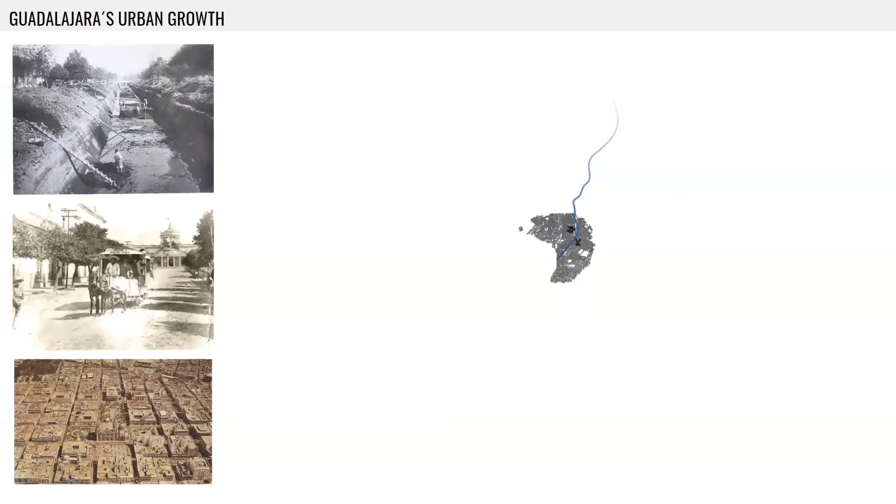Guadalajara's urban growth started within the settlement around the streams and further adapted to the Spanish colonial grid. After understanding how the city developed, we could conclude that the last 20-year settlement expansion had taken place towards La Barranca and its surroundings.

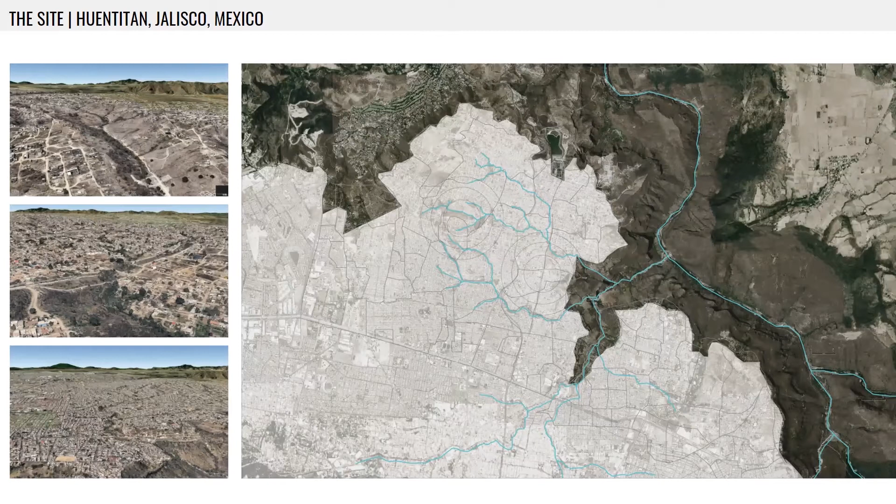Within the site, we can observe a classification of settlements differentiating those formal from the self-built ones. The latter are considered with this nomenclature due to the spontaneity of their conception, their lack of services, and the precarious public infrastructure such as paving of the streets and public lighting.

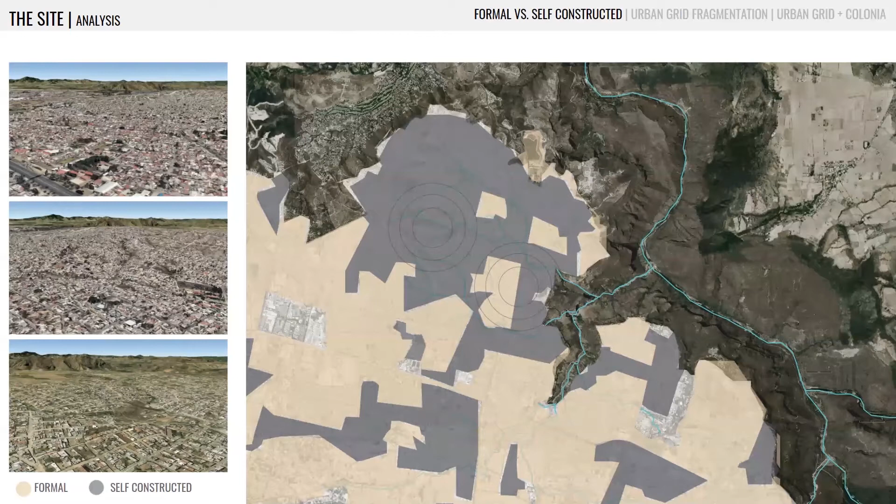Even though the barranca is known as the most relevant topographical accident of the place, it was also possible to identify a sequence of topographic variations through the Zapopan sector that characterize the place.

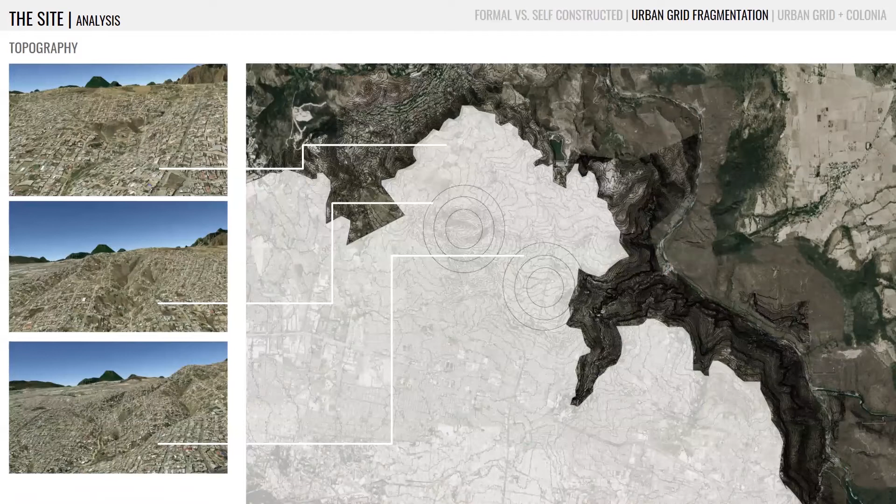In addition to those that have a constant water flow, there are also dry streams, where in certain sectors they are used as communication routes, but then they are exposed to possible floods and landslides in periods of rain.

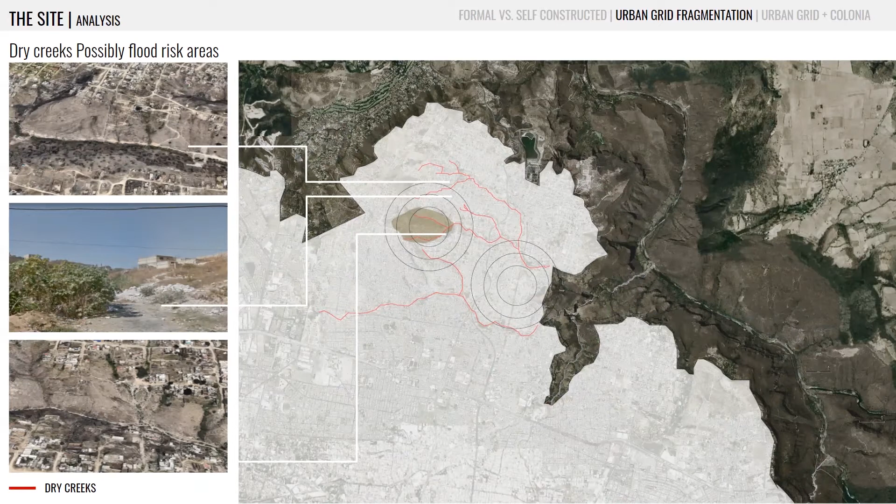Lastly, analyzing the actual urban grid, we figured out that it doesn't correspond in its entirety to the conformation of the colonies. So it was possible to identify a coincidence which includes the ruptures within the grid and the limits within the colony and between one colony and another.

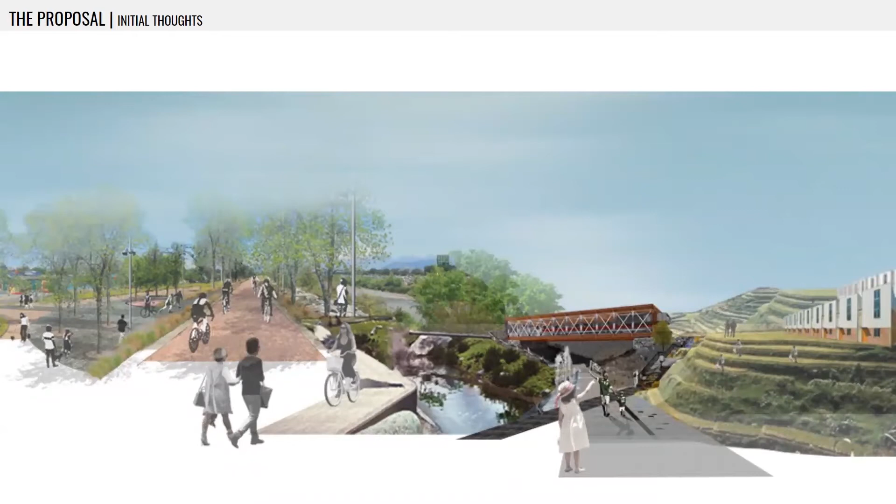The ruptures have become barriers within the community, creating boundaries and isolating the different colonies because of the lack of connection. So for us, these empty lands are considered as potential areas for networking of connections that bring the barranca into the urban grid and integrate the different elements that conform the city.

A reading of the metropolitan scale allows us to select testing areas that can help us enhance the replicability of strategies and obtain the integration between the urban fragments, mostly the colonies and programmed and self-constructed settlements.

Specifically in Zapopan, we selected testing areas in which present dry creeks, abrupt topography, and infrastructure act as boundaries between two sides of the city.

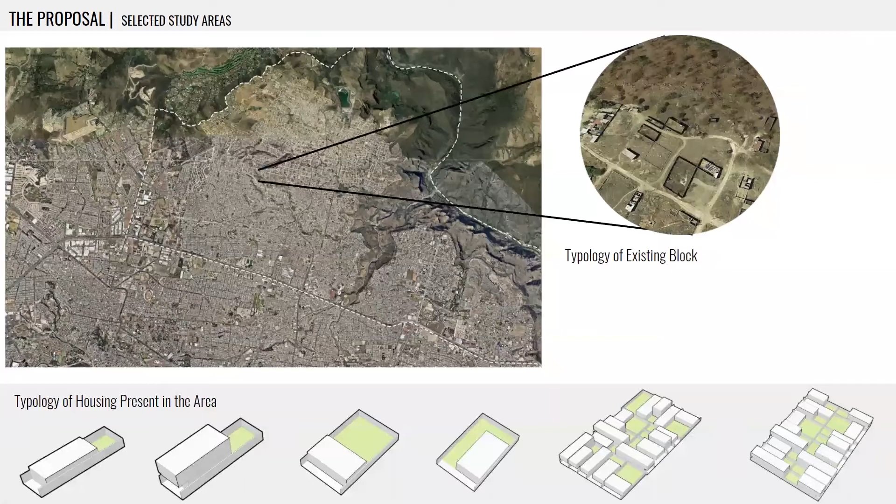Within the sector, we identify the following housing typology and block conformation, predominating the distribution with backyards and separation by dividing walls.

In order to achieve this proposal, there must be a developed connection system, including transportation routes, corridors between urban green spaces, and creek rehabilitation, trying to keep a holistic view within the urban grid and the rupture integration for further replicability.

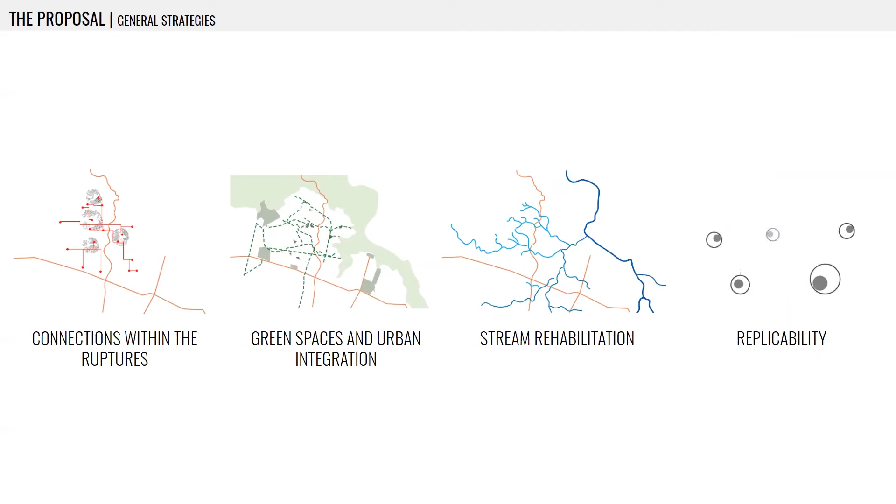The green armatures analysis allows us to identify the main intervention areas.

For areas that appeared to be more consolidated, central transformative fields were proposed to improve the quality of the settlements and boost the economy and tourism of the region.

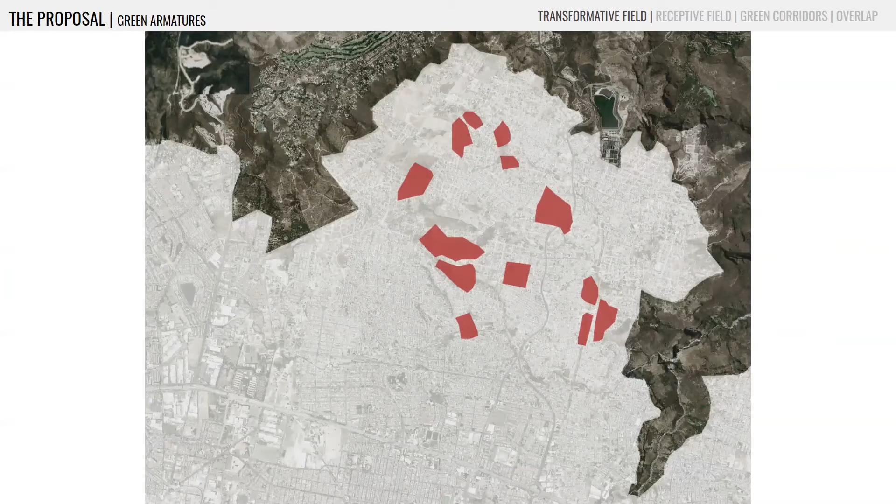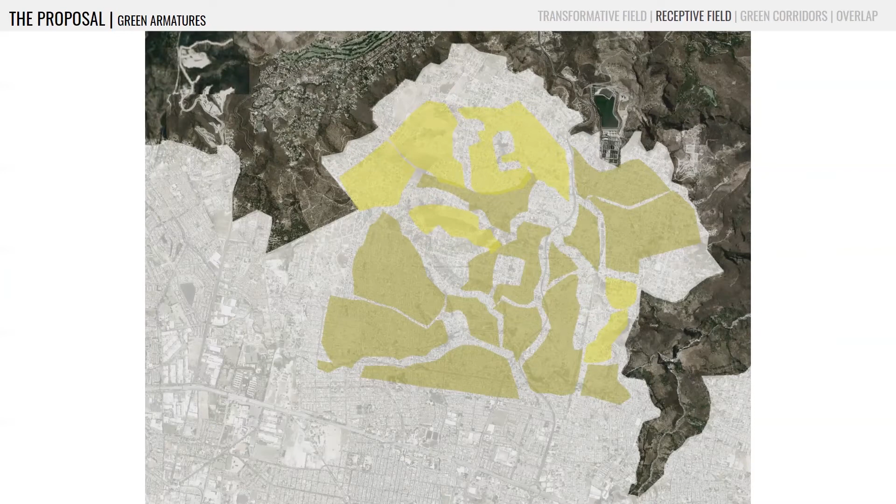On the other side, receptive fields were proposed in less consolidated areas, including actual empty lots to allow the new settlements to come in. These fields were all integrated by a network of corridors that are meant to attract activities into the area.

Once the study areas have been defined, it is sought to take advantage of the natural character of both sectors and use it to generate new connections, to integrate the green of the canyon to the rest of the city.

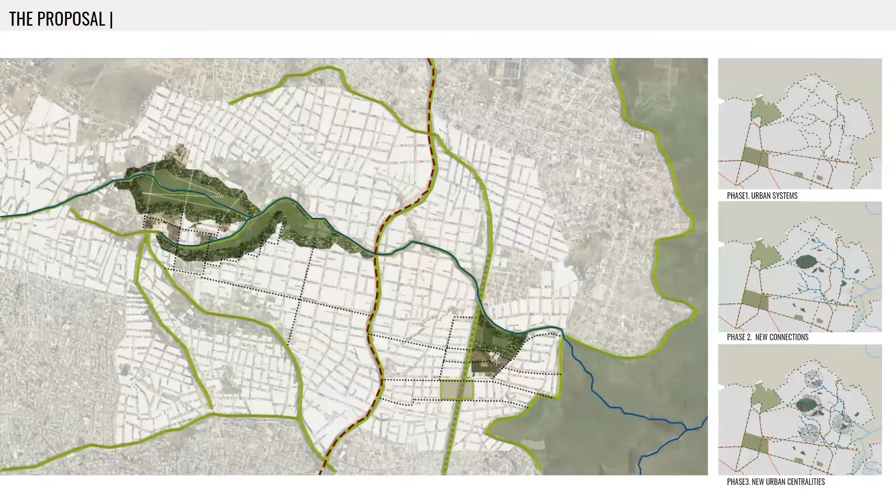The first intervention sector is characterized mainly by the presence of topography and former creeks that are currently dry and tend to fill up within the rainy periods, turning these lands into possible risk zones for self-constructed settlements.

To study the urban growth of the site, we can appreciate that since 2005, self-constructed settlements have started to appropriate the empty space, despite the rough terrain and the presence of vegetation.

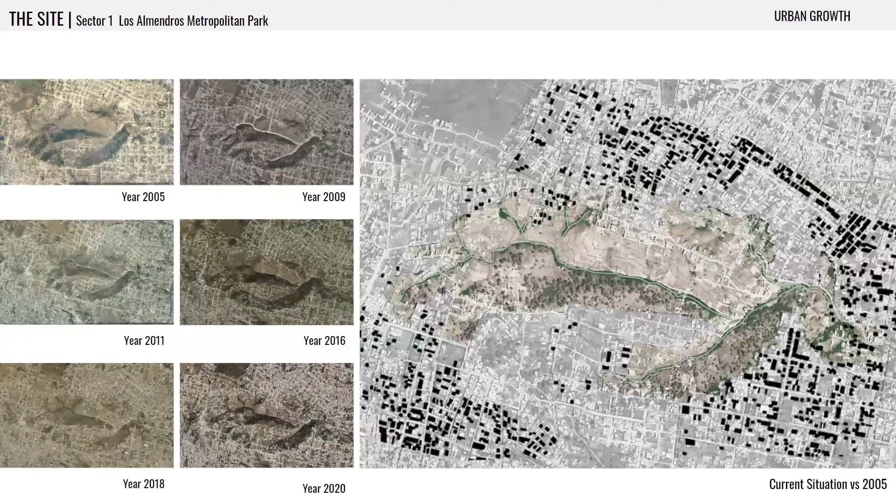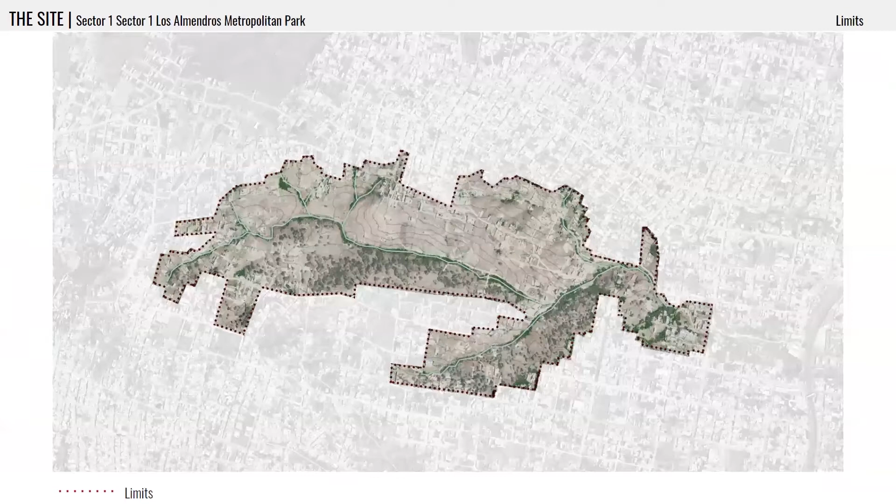To comprehend better the extension of this rupture, we proceeded with a series of analyses where we could identify the limits of this fracture.

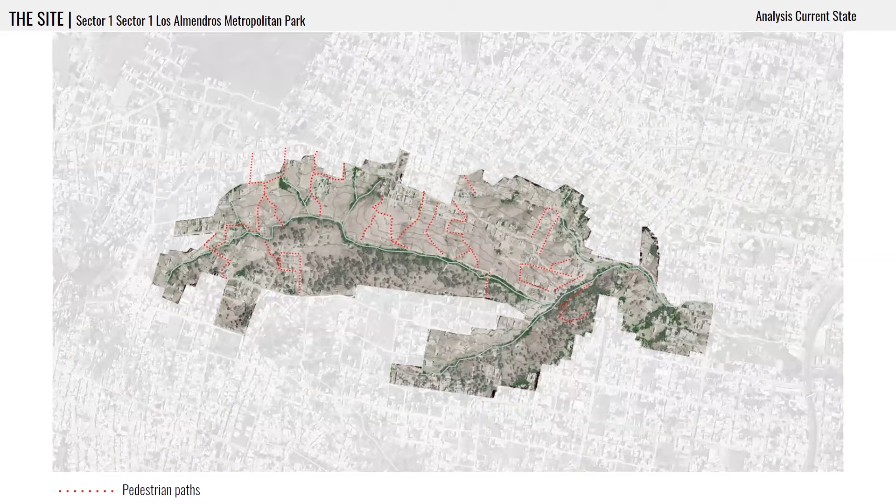The vehicle roads surrounding the site, and the pedestrian paths that were made spontaneously by the locals over the years. It's because of this analysis that we've noted there is an intention to connect both sides of the canyon. However, the paths that currently exist do not allow such connections.

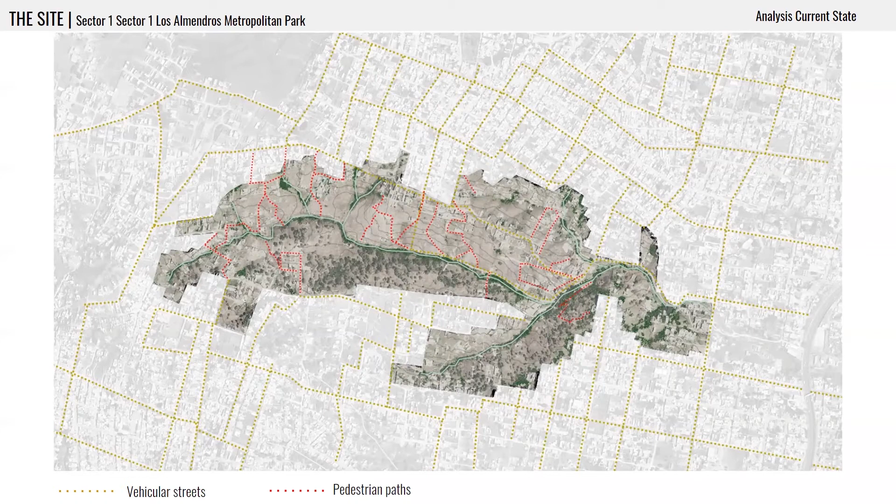Because of this, we categorize the green areas into green protected areas inside the rupture and semi-occupied areas. At the same time, we realize there was a greater presence of vegetation on the south side of the canyon.

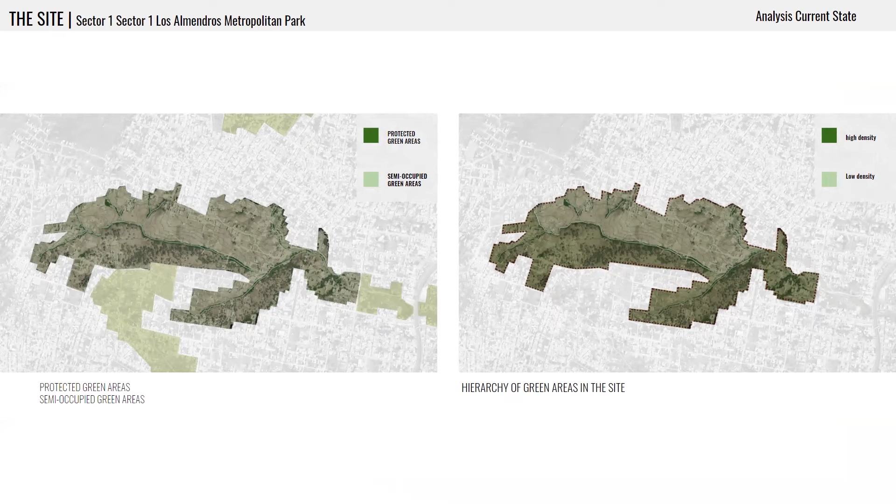Finally, we've identified the main existing connections and noticed that some of these roads branch into the ruptures, penetrating the boundaries between the city and the protected green area.

In this sense, we can also appreciate that the growth of these settlements stops abruptly in some areas, but in others, it slowly emerges into the canyon. This way, defining soft limits and hard limits, leading us to identify a sectorization that qualifies the unused space and thus the urban relations.

This way, the proposal is structured on the definition of green areas, which seek to become a mechanism through which protected areas can be created, allowing creeks and land to be rehabilitated.

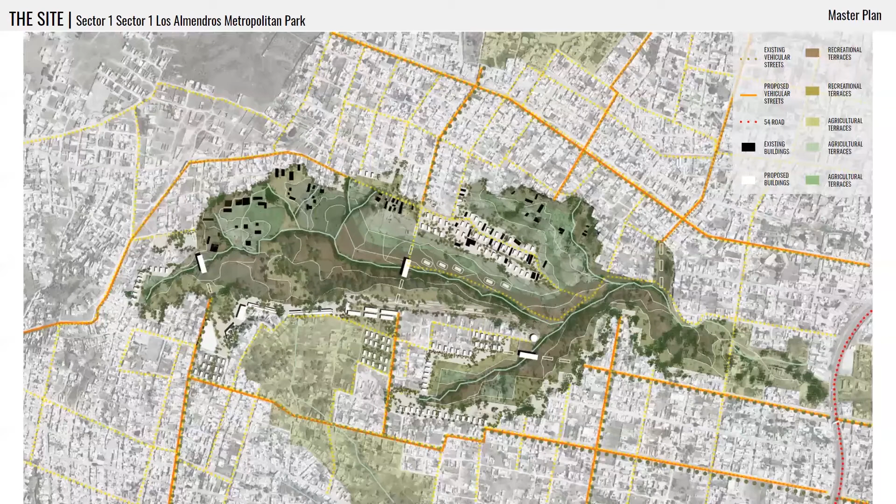This consolidates a new urban park that allows the connections between the colonies and its surroundings through different types of connectivity systems, which allow it to integrate the park within its limits as well as with the rest of the city.

Through green and mobility corridors, the proposal seeks to integrate the vegetation and the nature to the rest of the urban grid, taking advantage of the empty lots to generate a new housing typology that defines and serves this main corridor.

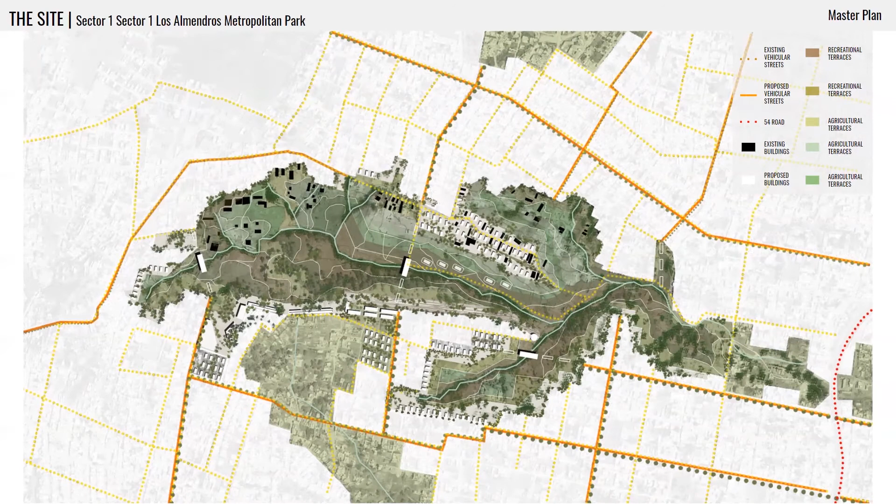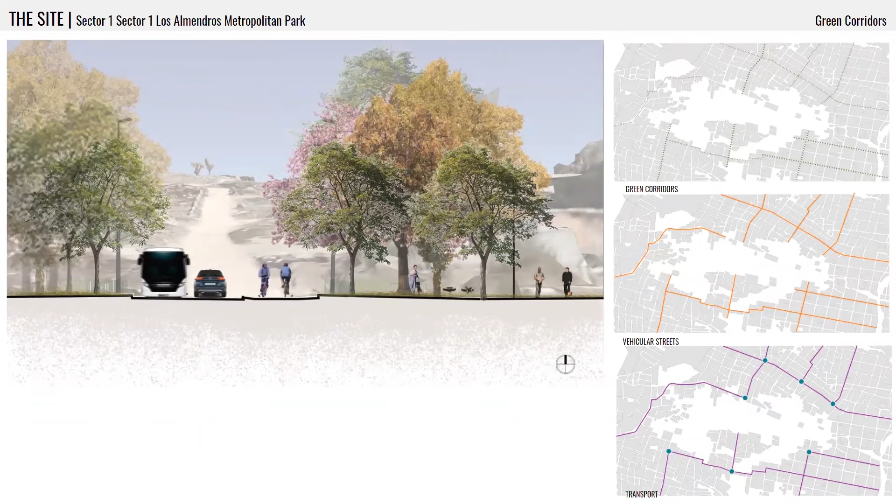This way, creating new mobility strategies, integrating bike lanes and public transportation systems to the existing urban mobility.

However, the proposal seeks to integrate the existing housing typology by establishing an order that allows the creation of new self-constructed housing in the site, focusing on the integration of the urban grid with the limits of the rupture and the creation of new urban facilities that can promote social and cultural integration.

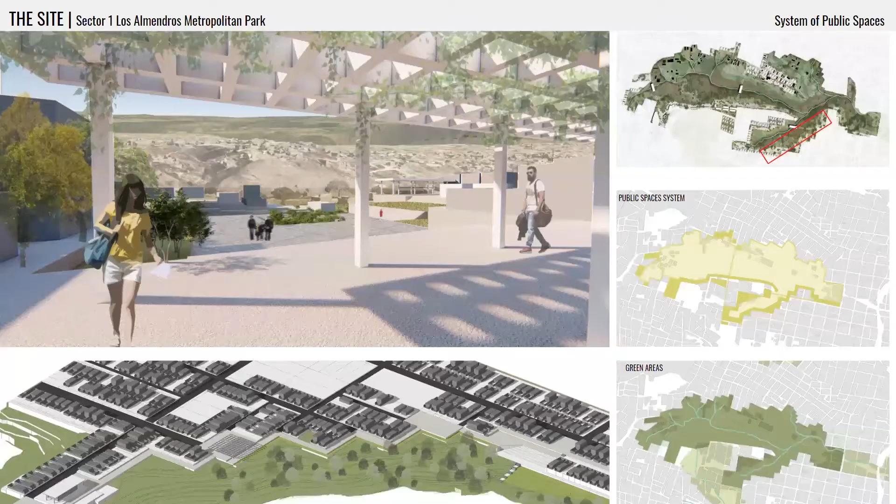More defined limits are taken as an advantage to create the integrated scale zones between the homes and the new metropolitan park, which allowed the community to enjoy spaces that are more friendly to the family environment and to everyday life.

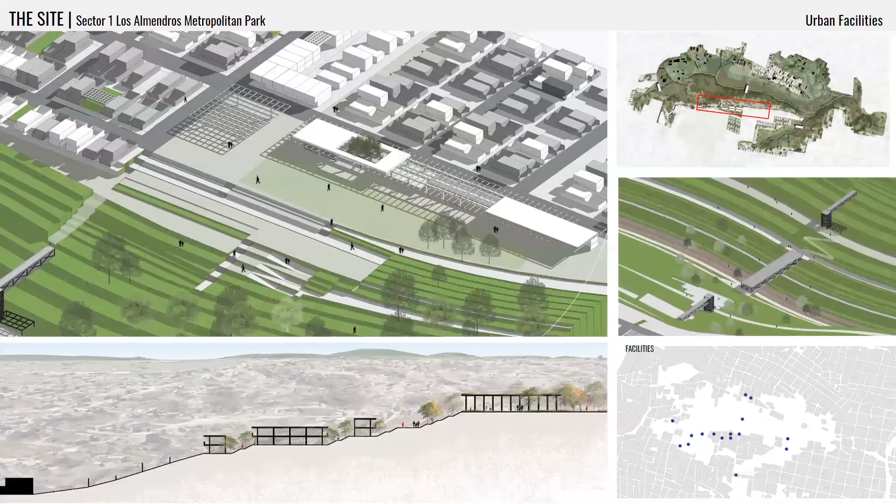Then, in the less dense limits, there is the opportunity to establish new urban facilities of an economic and cultural nature that, in addition to serving the community and its integration, become a transition between the metropolitan park and the urban grid.

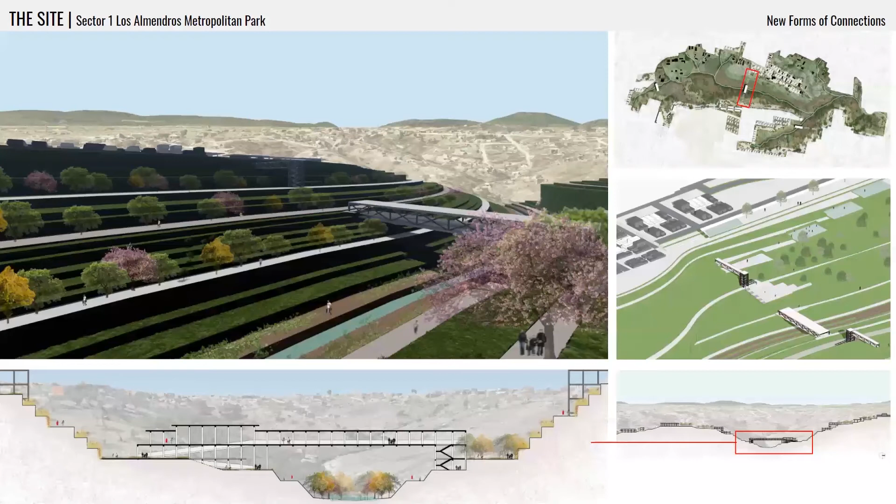One of the main objectives is to generate new forms of connection, which is why a system of bridges and stairs will be created to connect both sides of the canyon where people already were seeking to travel.

Likewise, these elements are not only provided as connectors, but also as urban facilities that provide service within the park for the community.

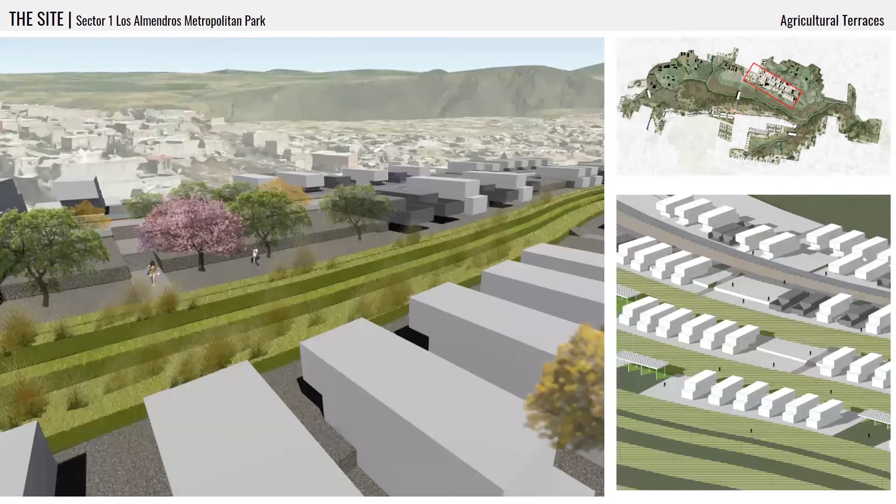Sloping land is proposed as agricultural terraces to boost local production and reduce the growth of the settlements in a non-controlled way. By including public spaces and urban facilities for the community, consolidating a transitional space between the existing housing and the canyon area.

In search of more effective connections, a structure that generates faster connectivity is proposed, prepared with equipment, formalizing a more dynamic route that alternates with terrace routes and slopes.

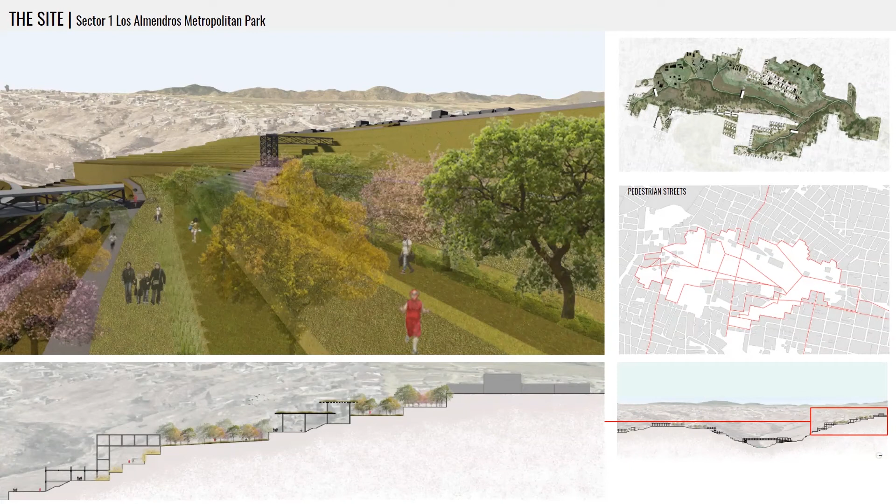Finally, the typologies used for the conformation of this new urban park seek to integrate the fragmented spaces within the city, redefining the interstitial spaces and thus generating a new centrality.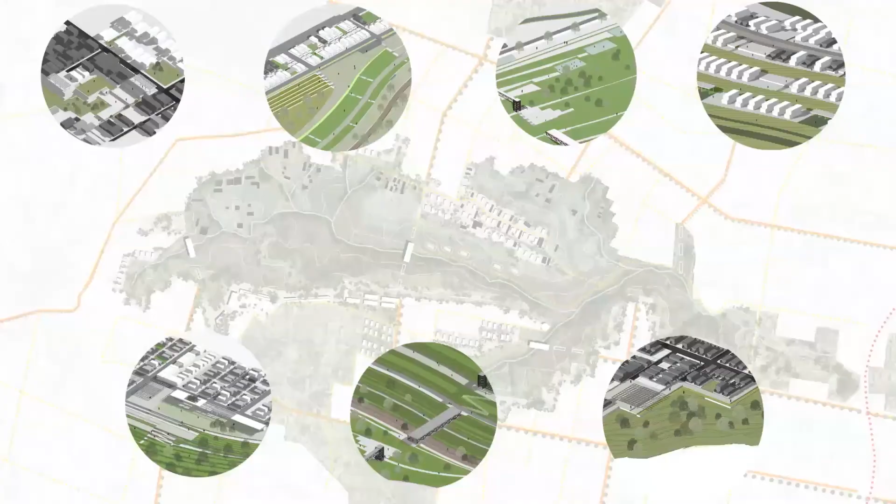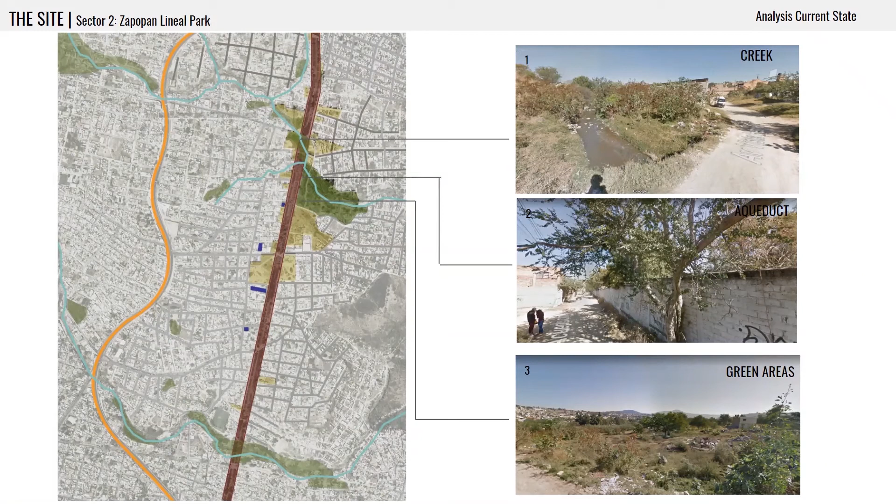We proceeded with the sector analysis, starting with its limits regarding the aqueduct and the empty spaces. Then we looked at the road system and the current transversal connections.

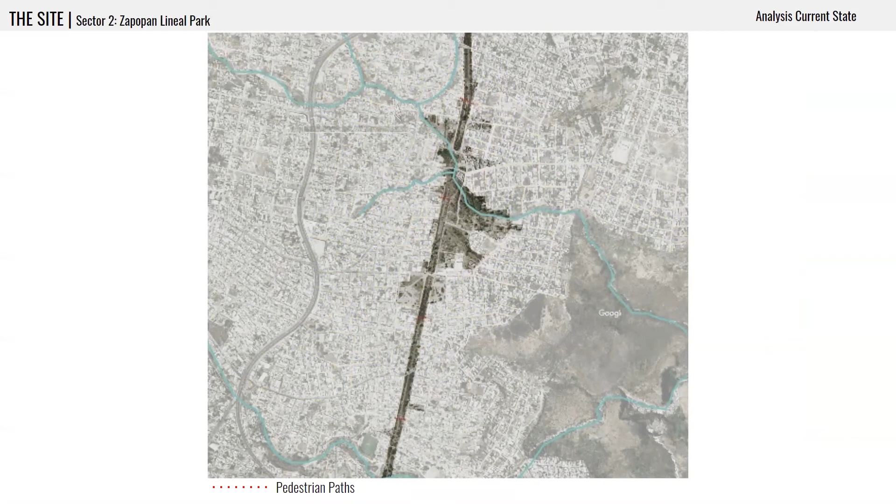We also located the pedestrian paths, observing some existing pedestrian passages that cross in an east-west direction. Both were overlapped, and we watched how the current green areas surrounding the infrastructure that divides both sides of the sector are directly related to a creek.

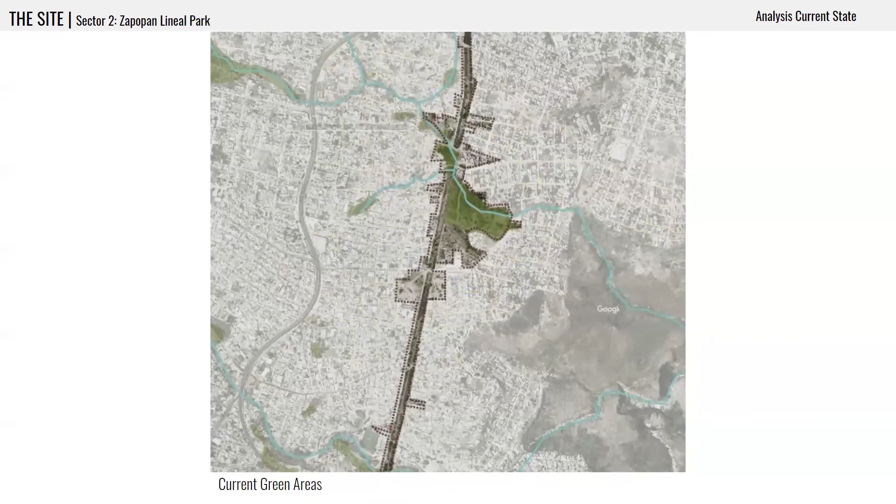It is also important to analyze the ruptures within the limits, characterized mostly as empty lots with subused features, some near the stream and others bordering the aqueduct, and the border types, so we could identify which were soft for further intervention and which were hard.

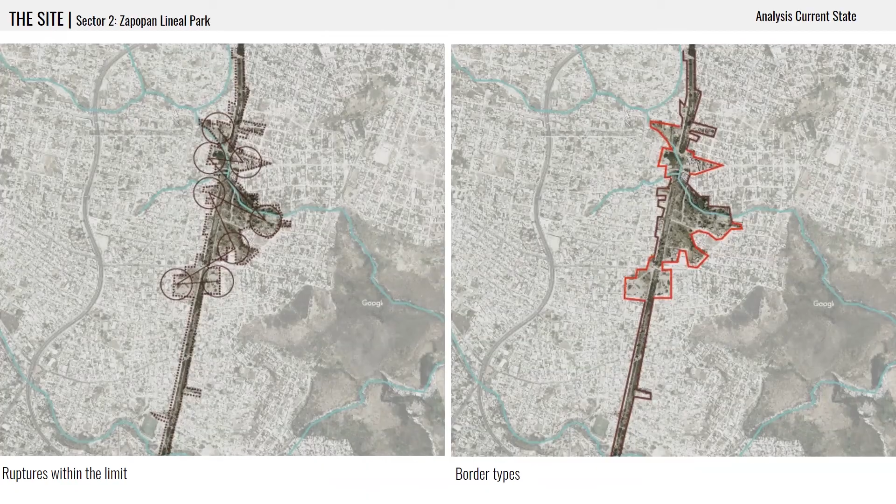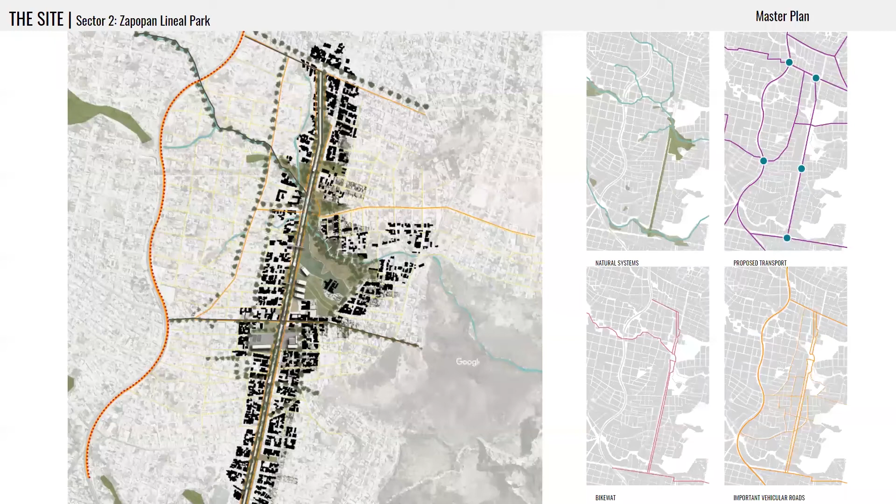An approximate sectorization with new housing typology, productive terraces, and recreational terraces was proposed. There are also proposed urban facilities such as a sport and ecological park and a cultural node.

For housing typology, we proposed a productive housing node, and at the sector limits, a series of housing reformations according to the sectors already shown.

For the above-ground aqueduct structures, an outside structure will contain ramps and urban stairs, creating new paths toward a city viewpoint.

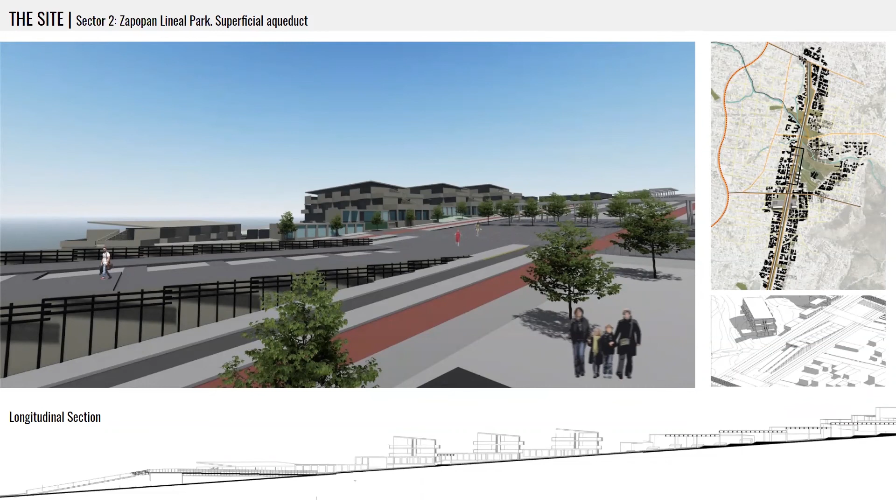For the path where the aqueduct stays underground and is surrounded by walls, we propose a whole new corridor that integrates its east-west dynamics within the sectors. This connection will be done every 450 meters.

For in-between spaces, there will be high pedestrian walkways. Both will be aligned to the vehicle road systems.

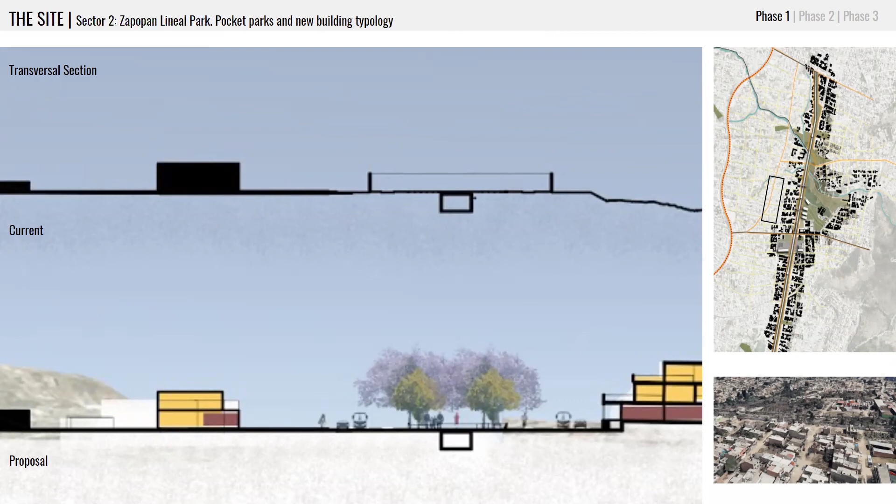Then we create an ecological park which will contain a tree-dense area, a children's recreational zone associated with an existing kindergarten, and a humid park regarding the creek.

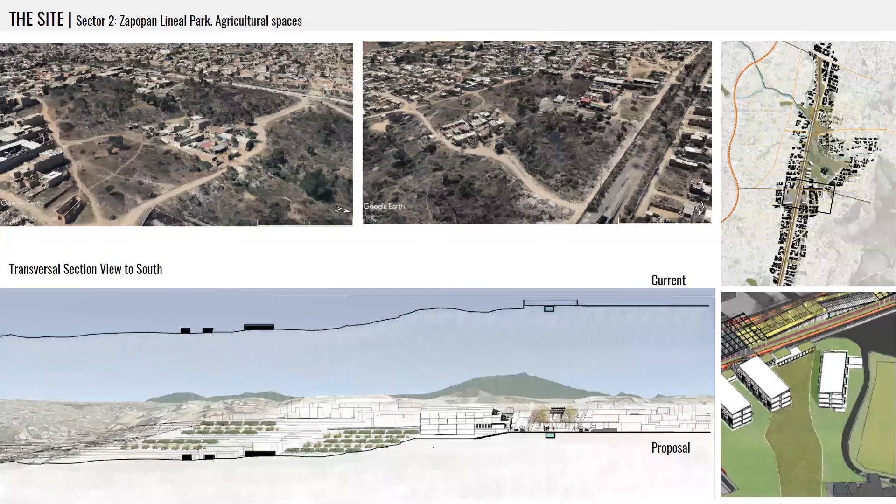Mixed-use housing is proposed. It will have a community productive area to create attraction zones for the new development. A commercial border will be proposed as a transition boundary between the lineal aqueduct park and the existing urban occupation.

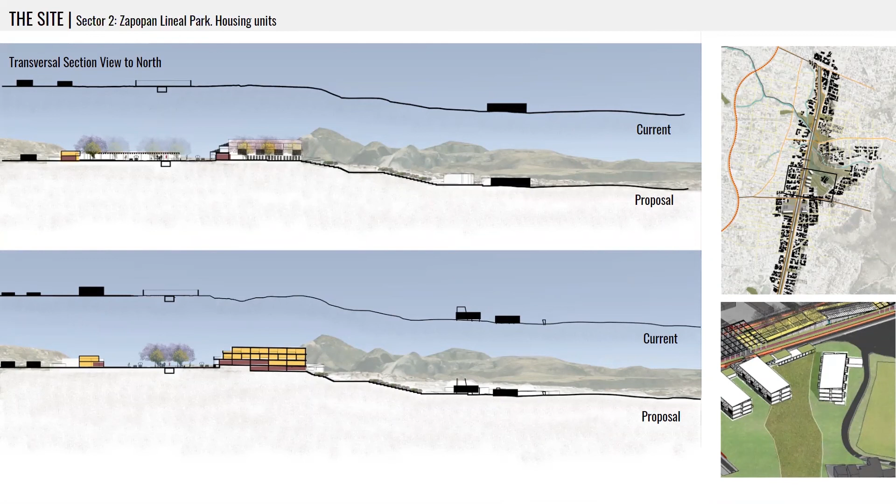There will be created crossroads and connections that go towards newly created pocket parks for community-scale use, which will provide the community new social and cultural dynamics.

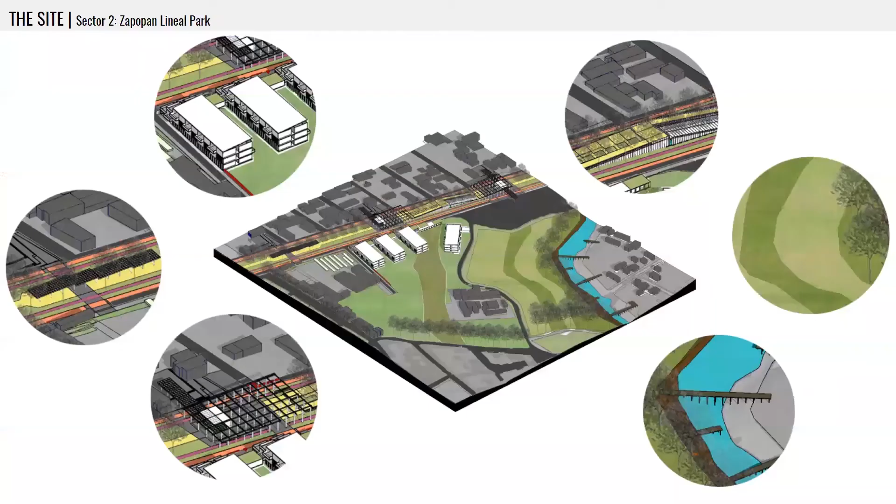Creating new public spaces for the city and enhancing the green spaces integration might create a great change within the place.

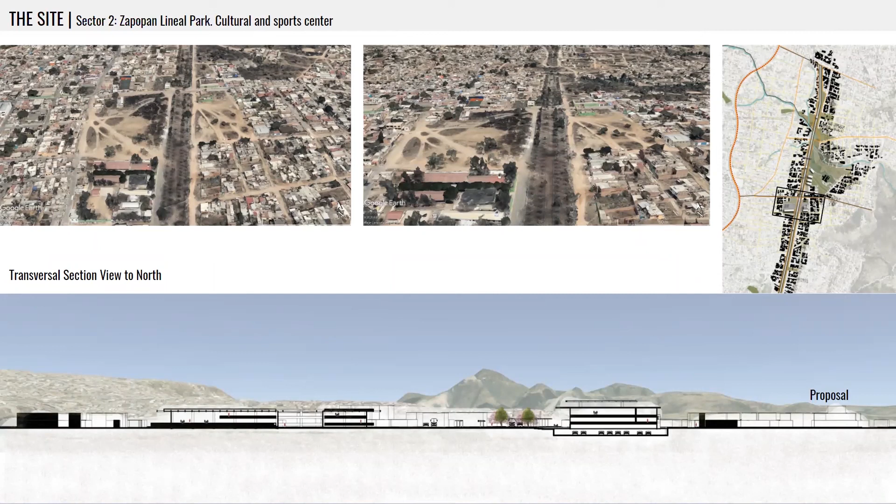And finally, the sport cultural node will consist of a covered sports center, open air courts, an auditorium, workshop space, and public square. A public neighborhood space, a neighborhood market, and a craft market, creating a sequence of spaces that blends both sides into one.

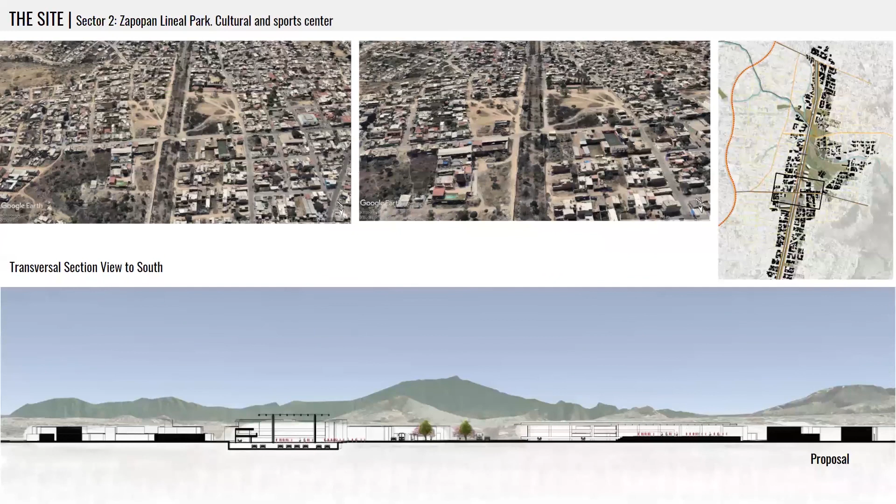Public spaces, green corridors, new mobility systems, and cultural recreational activities are given to the community for the improvement of social wellbeing.

Within the proposed strategies for these two sectors, we arrive at the conclusion that they can be replicated in other barranca sectors that match each analyzed condition, creating a new connectivity system that revolves around new centralities in the site.

Finally, the proposal seeks to integrate the fragmented spaces within the city, defining two base study sectors to later generate typologies that can be repeated under different conditions, taking the fragments as an opportunity instead of hiding the breakages and repairs. They claim themselves as an inherent part of each sector that only beautifies it and testifies to its capacity for transformation.

The barrancas are part of the city. They make it unique and define its identity.